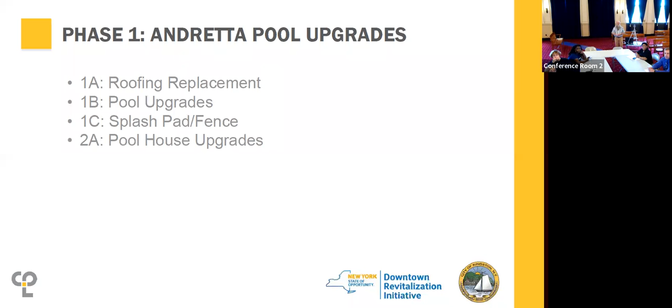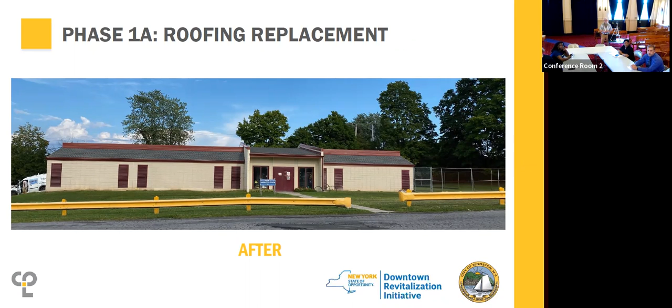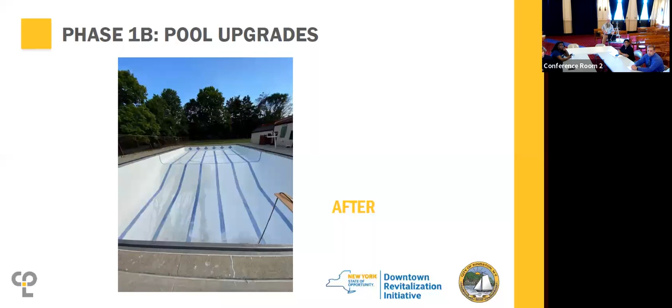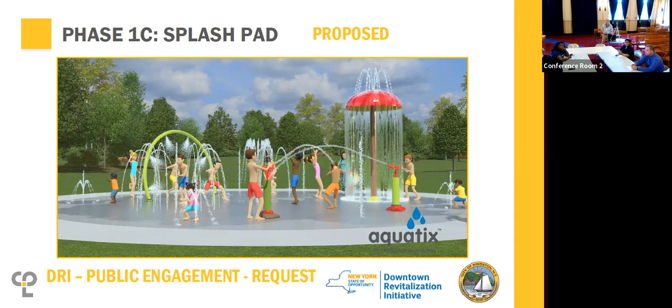And then we've got the splash pad. This came about during the public engagement portion of the project, and it was requested that maybe something could be done for the toddlers and whatever that don't actually swim. And it's now in and up and running, and they are loving it.

So now we go into the actual pool house upgrades. That's the existing floor plan. You can see the light blue is the men's locker, showers, and 2 toilets. And that peach color is the women's lockers, 4 toilets and showers. And the center is for the employees.

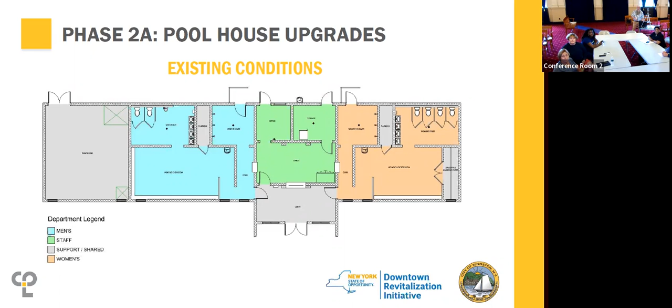We're going to change it around a little bit, leave the employees all in the center, but now the locker rooms are going to become individual changing stalls, instead of just a big room with benches. We're expanding on the number of toilets as we can. We put a corridor through straight to the pool from the entrance, instead of having to go through locker rooms.

And then right by the pool entrances, you'll see on the left is a family use toilet, and on the right is a family use changing area. Just for those situations when a mom's there with her little boy and doesn't know which room to go into, now they've got the facilities to take care of it. We're going to update the interiors, stick to a color scheme that you'll see later on with the stadium itself so that the property all becomes cohesive.

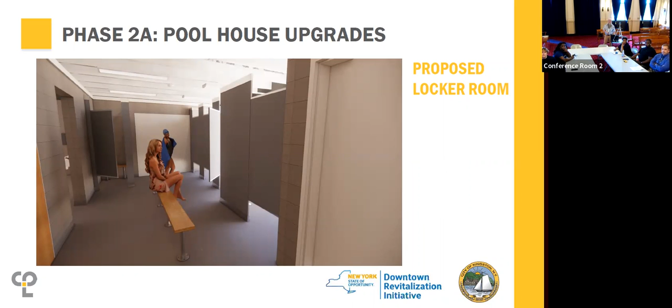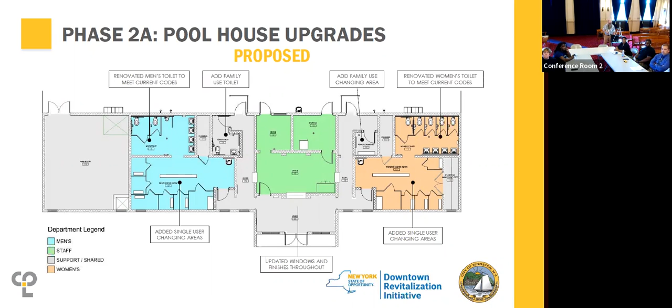And then the locker rooms with the private changing areas. What we did do is took the showers, the interior showers out, and there's now 4 shower banks on the outside of the building by the pool. So as you come out of the pool, you can walk up to the wall, shower off before you come inside. And we've also added at each end a bank of lockers so that they can lock up their valuables while they're in the pool, but still be able to see the lockers and know that nothing's going on. No interior shower? No interior showers, just the ones on the outside of the wall.

There were 4 shower heads in that interior shower room, which has now become our family toilets and family changing areas. And we moved the showers outside.

So that brings us to the rest of phase 2 for the project: electrical upgrades, the grandstand repairs, the press box renovations, and the master plan site work, which is extensive.

There were potential design alternatives that went through review, replacing the scoreboards and controls, putting restrooms on the visitor side of the stadium, a new concession stand area, resurfacing the track and replacing the turf, which is now 12 years old, I believe.

Relocating the basketball court because we're expanding the practice area. There's that big hill that heads up towards Forsyth Park, and at the top of the hill is a basketball court. We're excavating that whole hill and making a big practice green down at track level, which means we have to relocate the basketball court and adjust the road that goes around, the perimeter access drive, and all that.

And then the new entrance gateway improvements — when you first come into the stadium, there'll be a ticket area gateway on the visitor side of the stadium, instead of all the way to the back. Everybody will enter through that point, which the school is very excited about, because the visiting teams get to go straight to their visitor bleachers and don't have to go through the whole stadium and the rest of the school to get where they need to be.

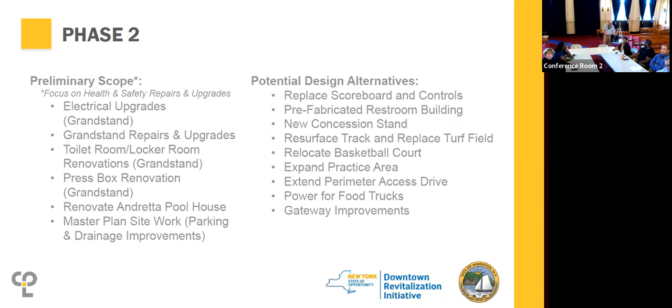The access drive goes all the way around the stadium. The school wants to be able to pull buses behind the grandstand, load the teams right into the buses, and get them off the property as soon as the game is over.

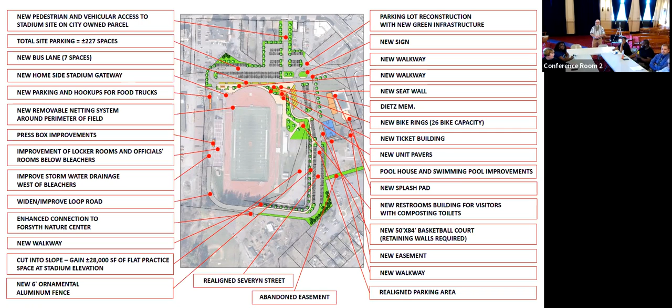So doing that roadway, you can see down at the bottom right-hand corner, that light gray area — that was the existing hill. That whole area is now going to get leveled to track level and become a practice green and multi-use area for the stadium when other things are going on.

So where the basketball courts are right now on that hill, that's all going to be dumped down and brought down to stadium level.

Now, where's the basketball court going? I'll show you in a couple slides, but we've found what we believe is a really nice solution — it'll be up at the top end of this picture where that new road is going out to Hurley Avenue.

So the interior showers are moved to the exterior — yep. And are they open? They're open air, there's a fence screening, but it's just, when you've got your wetsuit on and stuff, it's just to get the chlorine or whatever off. So it's different than if you were indoor and people were... Correct, yeah, it's just like a beach shower, when you're down at the beach kind of stuff.

And with the lowering of the basketball court area, that exterior walking track that people use — is that the access road? Right, that's now being called Severyn Street. That will still be up high. Really? Yep, so as you can see, it goes around the whole outer area, and then you've got that new line of trees down at the very bottom right-hand corner. And what is that? Where is that?

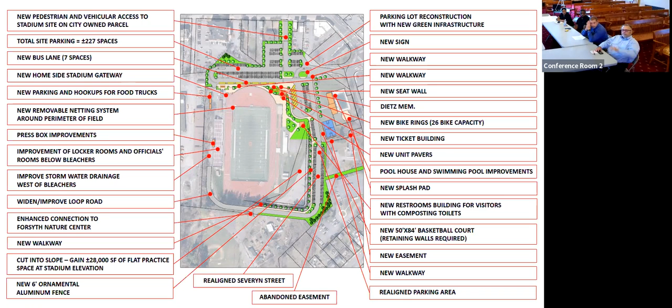So where will people be able to walk for exercise? The track itself is always accessible. During the day, when there's no traffic and the buses aren't running, this whole access road will now become an open loop for walking, as it is now.

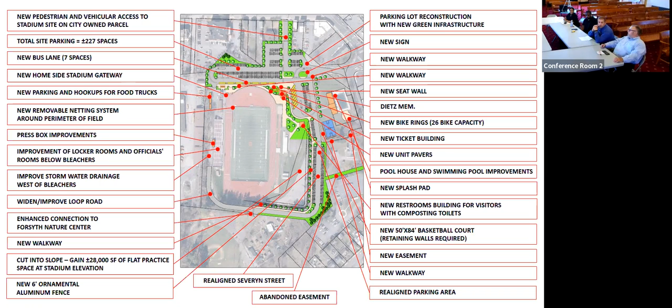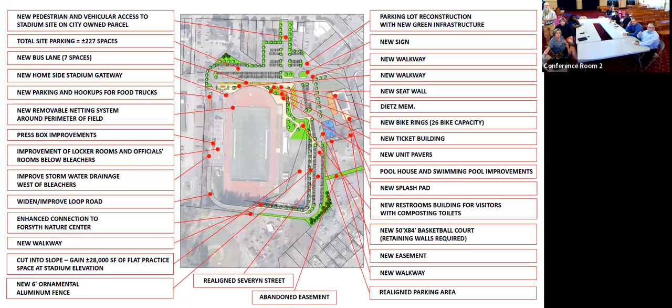Is there gonna be some type of accessible ramp going from Forsyth to Stadium? The accessibility would be to use this road to get down to this point if you're coming down from Forsyth. Now there'll be all new accessibility and ramps into the grandstand at both ends, so you wouldn't have to go all the way.

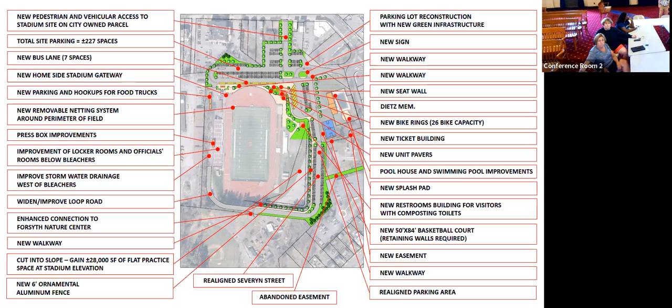One of the exciting things, which may come up on the next slides, is what we're actually doing to the grandstand.

Everything that's exposed up there is getting resurfaced, all new seating is getting put in, all the concrete repairs are being made, expansion joints, all the masonry needs to get repointed. We're replacing all the railings, replacing all the concrete copings, and adding handrails at the steps that go up to the bleachers.

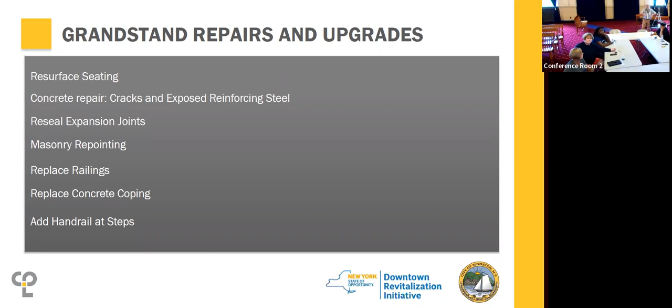All of this concrete wall work in front of the stadium now was added 15, 20 years ago when they created that new ramp that went up to it. That's all going to come out. We're taking that all out, and what we're proposing gets replaced is a much newer, brighter looking aluminum facade, with aluminum walkways and aluminum ramps to get up to the grandstand.

And the funding for all of this is— funding is my very last slide. But yes, everything, the mayor has made it an issue, and everything is currently bonded. Myself and grants management are currently writing two different grant proposals to help offset what is being bonded.

Does that include the resurfacing of the turf? Yes, that's another grant that we'll be going after. We've already got grants for the green infrastructure, for all the parking and site work. The grant that I'm currently writing is to be able to do all of that excavation work for the practice green, the press box, and the track and field.

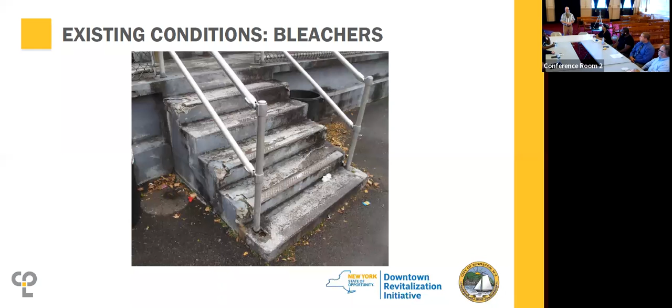It's not cheap, it's in the millions. We had an hour and a half Zoom meeting today with the company that did the original work, and we went through all the points and problems. They're putting together their proposals to do an absolute total resurface of the track and the turf, with all new upgraded hydro stuff that they're using. I had quite the lesson this morning.

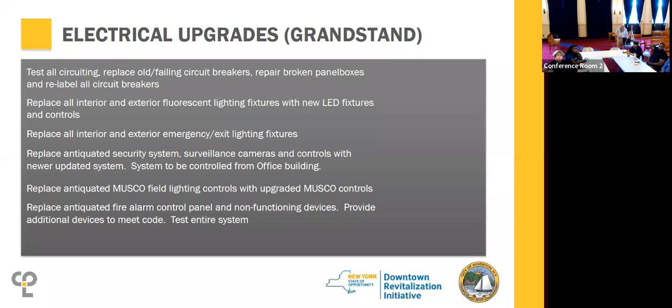So the other thing with the grandstand, the electric—it's a waste zone up there, so all the electric's being done. All of the lighting will get replaced with LEDs, emergency and exit lighting, the security system, and the controls for the outside field lighting will all be redone and new to meet codes.

The press box, we're going to update all the finishes, put in new countertops, create a new access ladder to the roof of the press box, put an actual press awning over the press box so they can put camera equipment up on the roof and broadcast from up there, with new video controls that will go through the whole stadium so both visiting side and home teams can do their videoing.

Will that be inside the actual stadium rather than on top?

Inside, well, I'm thinking safety issues if somebody's climbing up on top, so it's going to be limited access to the audiovisual people only. It's a ship ladder that'll get them up onto that rooftop over the existing press box. But at least it'll be roofed and covered, and the back three sides will be fenced and shielded.

So this is a layout of what was there. You see the access ramp that comes up to the one side. What you see in turquoise, we're widening all the steps going up to the grandstand, putting a handrail up the middle.

I had a request from both the school and the mayor that we look at trying to replace the seating with bench type seats that have backs. Unfortunately, the slope and the rise and run of this grandstand doesn't give us the room to provide that size of seat.

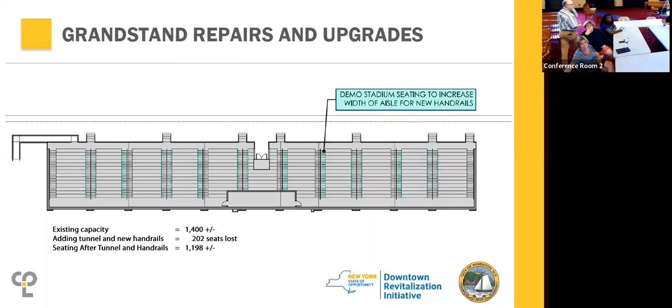What you're seeing in the middle, that notch with the 2 doors, that now is going to become a tunnel from under the grandstand, from the locker rooms, so that the teams can exit the tunnel and go straight to the 50-yard line of the field.

Which is why we had to look at ADA compliancy, because the only ramp was there. Once you put in the tunnel, nobody can get to here. So now we're doing ADA compliancy from both sides of the grandstand. We'll see the floor plan.

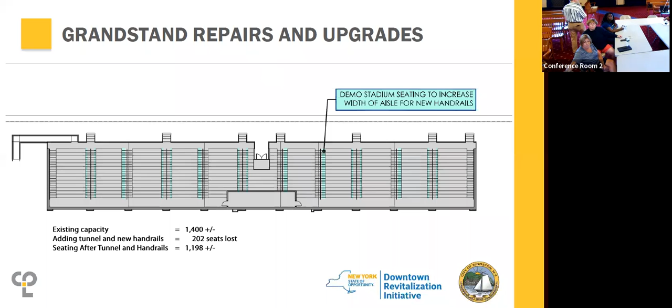So here's what's happening. It's renovating the locker rooms, enlarging the public toilets, which were way undersized, doing a lot of the site work drainage, replacing all the plumbing and fixtures, updating the HVAC and furnaces, and replacing the lighting and sprinklers.

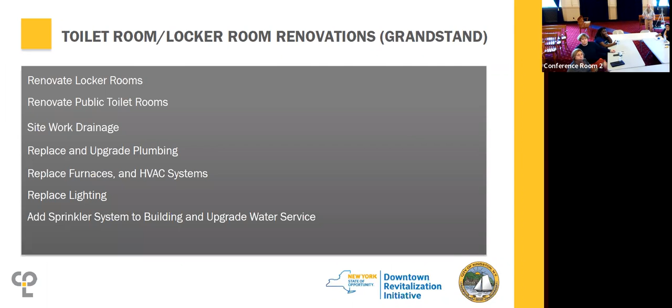This was the existing floor plan. You've got the light turquoise there, that's the visitors' locker rooms and showers. You've got 2 small bathrooms to the left, men's and women's. That gray blue was the home team's lockers and showers. And then the far right was all general purpose storage, electrical, and mechanical areas.

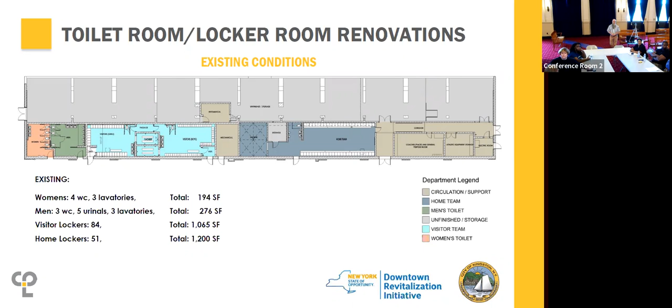So this is the new floor plan. We're moving into that area under the bleachers that still has the headroom. We're enlarging both the locker rooms, and we're swapping them around. So the home team will now be over on turquoise with that mustard colored room next to it, which will be an athletic training room.

I'll show you a picture of that coming up. You can see the entrance door in the middle, go straight down the hall and the doorway out to the tunnel. And then the visitors' locker rooms are on the other side, expanding the bathrooms and also providing personal changing stations as needed.

And then the bathrooms, men to the left and the women's room to the right, have become huge, as they needed to be for the number of people that are in that stadium.

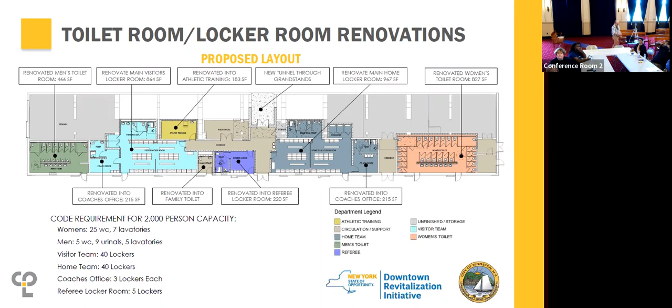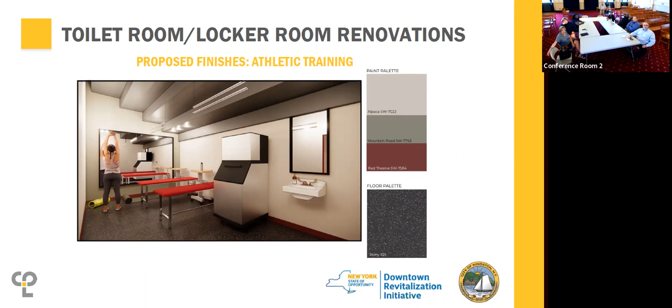This is the athletic training room, which would have a big ice maker in it for when the athletes come in and need to get iced down. There'll probably be a couple ice tubs, so forth.

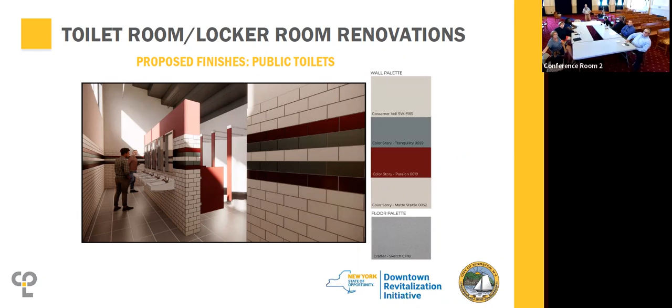So, cameras. Well, you can't put cameras in the bathroom, but we can have them on the door. All right, yes, we can see people come and go. Are people spending the night there? They have been, yes, we have taken people out of there. Unfortunately, yes.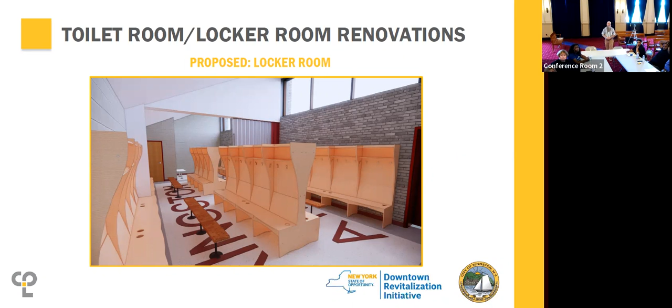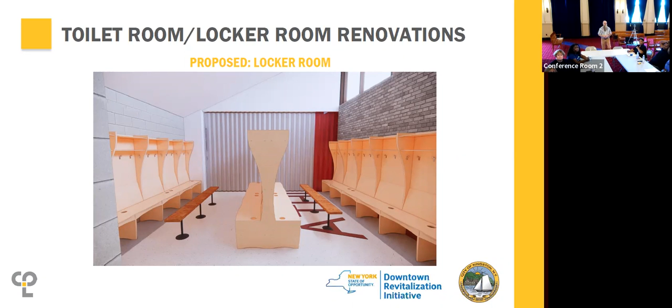One of the things the school asked for was: the big locker room is fantastic, but if they want to do an offense and a defense type meeting at the end of a game or at halftime, we have a movable partition that they can use to divide the locker room into two sides and have separate meetings and review during the middle of the game. The school has been working with us very well about asking for things but not demanding, and then we try to do what we can with it.

So then that's pretty much the concept of the grandstand.

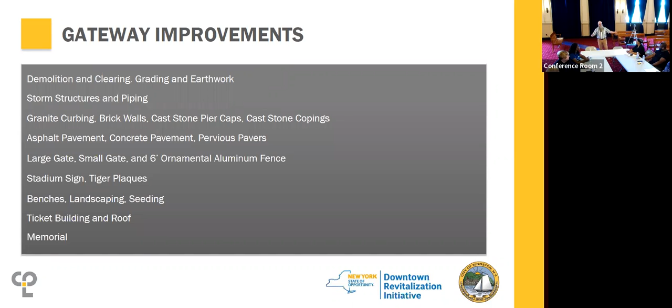The new gateway improvements: we're going to clean and grade and redo, putting in all new underground storm structures and piping, all new curbing, brick walls, cast stone, landscaping, signage, benches, bicycle racks, and a ticket building that'll be roofed. And then the memorial area, because it is Dietz Memorial Stadium, and there's a very nice memorial there that we want to maintain and keep. When you walk around the project, there are bronze plaques everywhere for everybody. All of them will be saved, and I think we'll be able to do a real nice memorial park on the property.

That's the footprint of the gateway. So you see the track off to your right. The main parking lot is down at the bottom of the screen. We'll have buses for both home and visitors. Everybody comes in, there's a little ticket building in the middle with a roof over the whole thing, a gated entrance, landscaping, benches, seating, and the visitors go straight up to their bleachers, while the home team goes around the bottom of the track to get over to the grandstand.

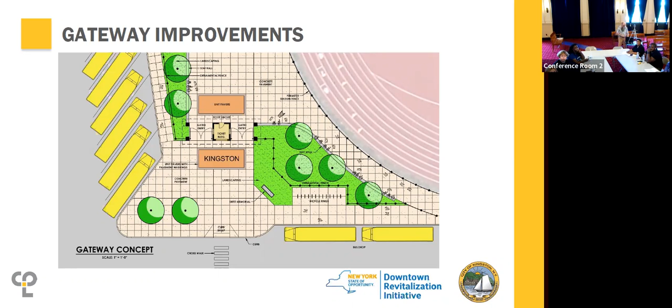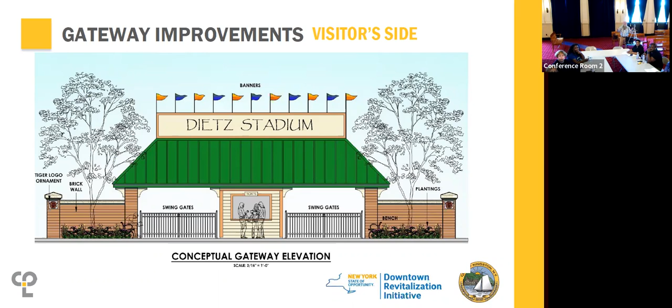That's a concept of what that entrance gateway will look like. Whether it'll have flags on top, we're not sure. But again, you've got a ticket booth dead center. They open up the gates for coming and going, but yet you're still protected.

So the concession stands, we looked at them in several different ways. Up in the upper right-hand corner, you can see what's existing, and then there was a small administrator building, office building in front of those. Both of them are coming down, and to the left is the replacement. The building portion, the enclosed portion, will be closest to the parking lot. The back side of that will be the referees' lockers and bathrooms, so that the referees can come in from the parking lot, get right into their facilities, and be out of the crowd. Didn't know that was an issue, but I guess sometimes it has been.

And then the front section that you're seeing with the windows would be concession. This particular picture only has one bay of a covered roof; we're bringing it out two more bays, so there'll be a lot more covered area for the stadium users. And we're making it food truck accessible, so food trucks will be able to pull up to each bay and serve right to the concession stand from food trucks.

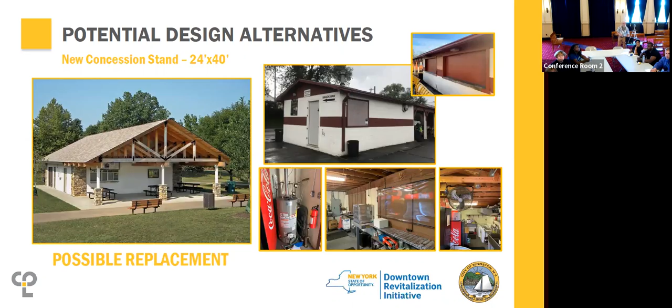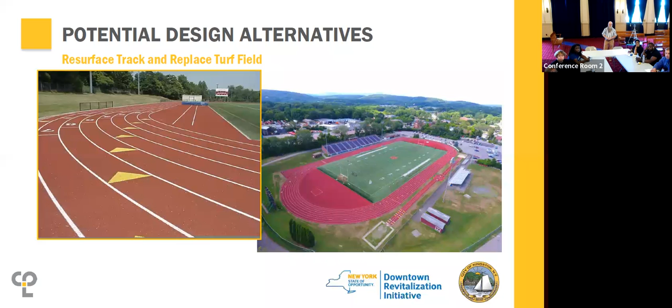Of course, the track and field replacement was an alternative, but it is now fully in the plan. It's time. We can maybe get one more football season out of it this year, but then it's time to do it.

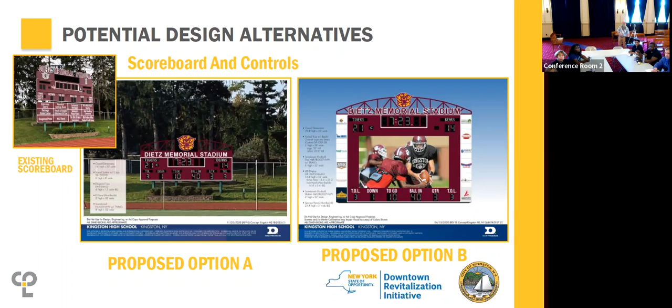This is a city-owned lot that right now has about 18 parking spots in it. So we're going to make that part of the stadium. We're going to create this access lane out. It's going to be 2 lanes, so during the day it's in and out. But at the end of a football game or a soccer game, it'll be policed and it'll be 2 lanes out, get to Hurley Avenue and get off the property.

The 2 neighbors, I've already met with them. This new business, they've done a beautiful job on the old monument structure that was there. They've got a gallery and a pottery studio. They were disappointed that they weren't going to have access to a big parking lot right behind them any longer.

But this is where we're looking at putting the basketball court. It'll be partially fenced so that their business doesn't get disturbed. They do have 2 egress exits out of the back of the building. Our property line is 6 inches from their wall.

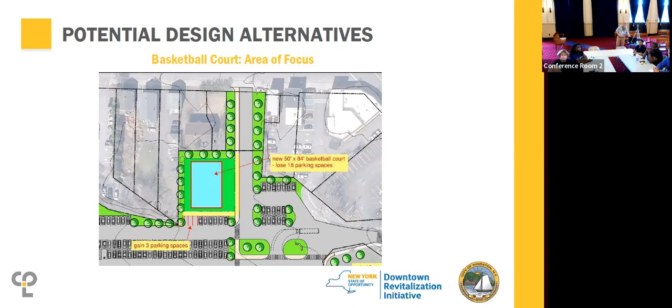Yep, full size. We had looked at putting it over by the pool house, but if we went over there, it would have had to been shrunk down because it was rock wall and stuff.

Any benches or anything near there? At the basketball court, absolutely. There'll be at least 3 or 4 benches on the sidewalk side and then 2 more benches over on the neighboring property side.

So that brings us down to time frame. Where are we at? What are we doing? We are on schedule as of right now. You can see that the bidding phase of the pool house and the design approvals, and we're supposed to go notice to proceed. We're right on track with that.

As soon as my plumbing bids come in on August 2nd, I'll be going to contract with the 3 primes and giving them their notice of award.

As soon as the pool closes on August 28th, they'll get their notice to proceed, and we're going to ask them to be on site by September 19th. They've got until next May to get it done, because then we're going to be ready to open the pool for the next season.

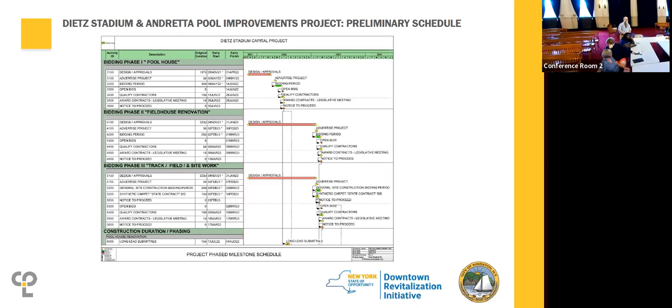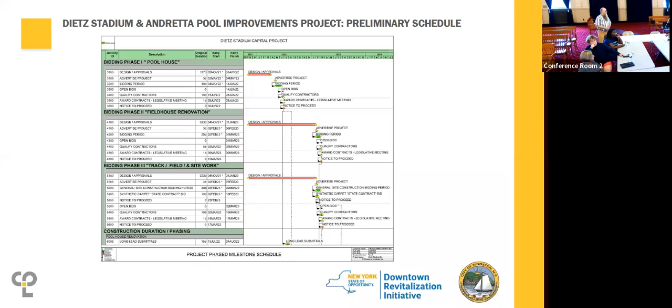The rest of the design approvals for all of the field house renovation, the site work, and so forth, will take us right into the beginning of the year. The school has agreed for the stadium to be shut down in November, the end of their football season, and then we've closed it off for a year and 3 months of construction. Next season, they're going to have a lot of away games. Not happy, but they understand what the outcome of the project is going to be when it's all done.

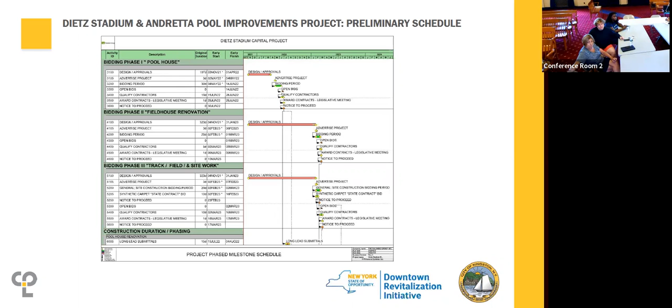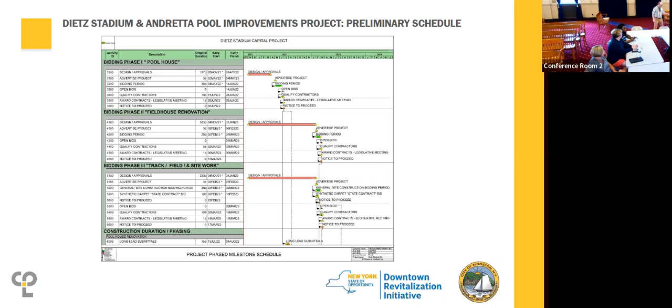So hopefully the approvals, the designs and everything get done by the end of the year. January, February, we start going out to bid. The bid process for all the different prime contractors will go on, and we end up with a notice to proceed on construction March of 23, running through till March, April, maybe May of 24. That's our time frame, bringing us right up until March or April of 24.

And there's the monies. The total project cost at this point is $18,628,622. We've already received $5 million in funding from the DRI, Downtown Revitalization Initiative, from the DEC, and from Parks for the green infrastructure. So that leaves a balance of $13,628,622, which the common council has bonded.

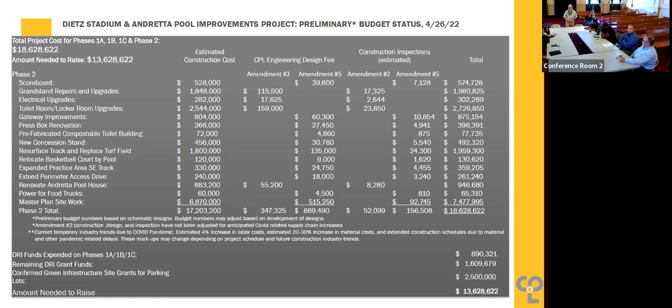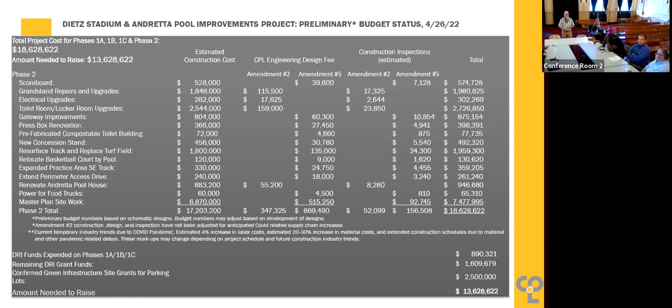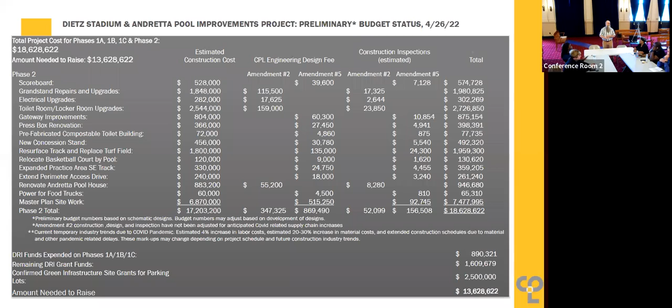Now it's our job, grant management, myself and the rest of the team, to start finding those other grants that are out there to cover this so we don't have to use the bonding if we don't have to. But the good thing about the city taking this on and authorizing the bonding means we don't have to stop now. We know that the money's there. We're going to work our best to find it from elsewhere, but we don't have to wait until we get a grant. We already know we've got it. We're going to move forward with it. We're going to make it happen. I'm excited.

And that was the short version of that big presentation. Questions and answers and discussions, and I think we filled them in pretty well as we went along. I appreciate you letting me be here and bring you up to speed.

That's an impressive presentation, yeah. Yes, it's going to be a lot of fun.

I sat around for 2 years twiddling my thumbs. I didn't know what I was going to do next. And then this came in, went to the interview with the mayor and with Lindsay. They told me they had 20 applicants for the job, and I was by far the best applicant. So I'm hoping to be able to get it done.

It's quite impressive. Yes, it's exciting. Wow, it changes the game. Yeah, this will put Dietz Stadium back on the map. That was a good question. I mean, the place—right, because again, at one time it was, and then it fell out, and new ones came in.

One question — has anything, is it being lit by solar? Do you have any solar panels involved with any of this?

Julie Noble, who is our sustainability person here in the city, is looking at this extensively. She has a full array of solar going on top of the Andy Murphy Neighborhood Center right now. When that gets done at the end of next week, that building will be off the grid — we'll have enough solar energy to feed that building for the year. The next step is to try and put battery banks in the basement so we can generate electricity if the power goes out in the city, and use it as a shelter should it be needed.